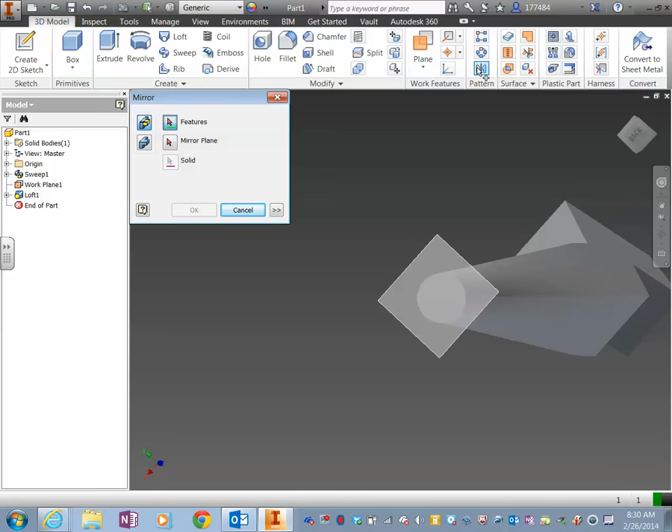So it's underneath the pattern, this little one right up here that's a mirror image of each other. The first thing you do is create your feature, and I'm going to click both of those features. Then you select the plane you want to mirror around, hit OK, and I've now mirrored around that plane. That's how you use the mirror feature.

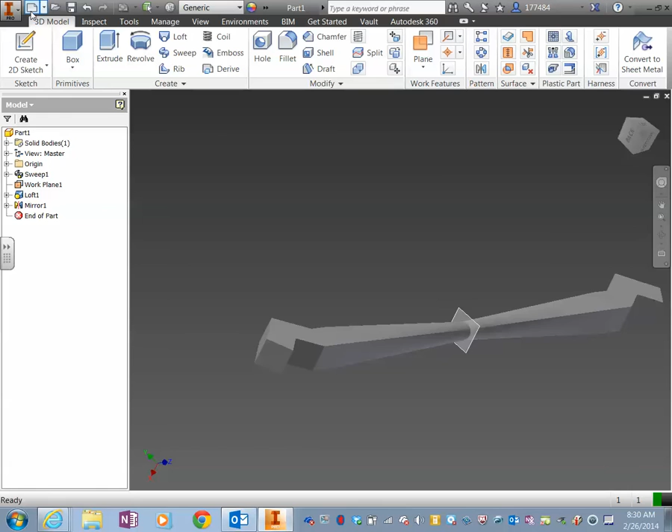Next thing we want to do is create or be able to draw on a circular surface. Unfortunately, the reality is you can't draw on a circular surface, you can only draw on flat surfaces. But sometimes we need to get to that, at least have a flat surface on the circular surface that we can draw on.

So to do that, I'm going to create a circular surface, and I'm going to do a cone, just to be a little different. Hopefully I've touched all my edges here. Nope, I haven't, so I need to make sure it's a closed shape.

Alright, so there I got a nice closed shape, and then what I'm going to do is I know that this is going to end up making a circular surface because I'm going to revolve it to make a cone. So what I'm going to do is put a point right there.

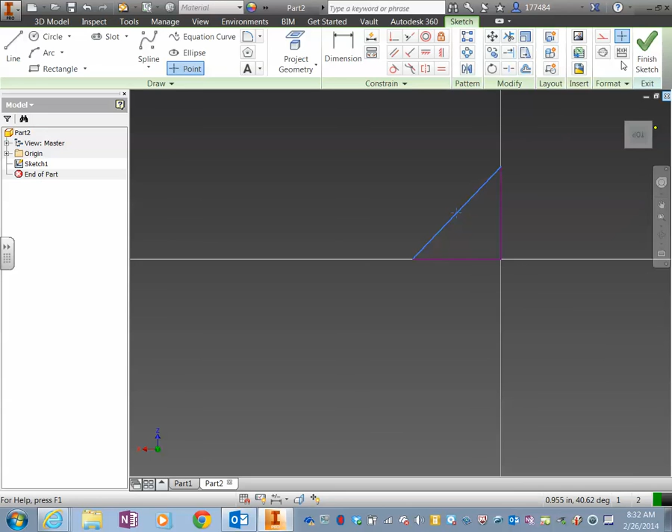You can always go back and add a point later on when you figure out that you want to draw a work plane on there. Go ahead and finish my sketch, and then I'm going to do a revolve around here and hit OK. Okay, now that's consumed.

Here's the secret: you have to make the sketches visible, because there's a point on that sketch, but I can't see it unless I make that sketch visible. And hopefully, yeah, it's right there. But I have to make that sketch visible to be able to use it. Can't emphasize that enough—when it doesn't work, chances are it's because you forgot to make the sketch visible.

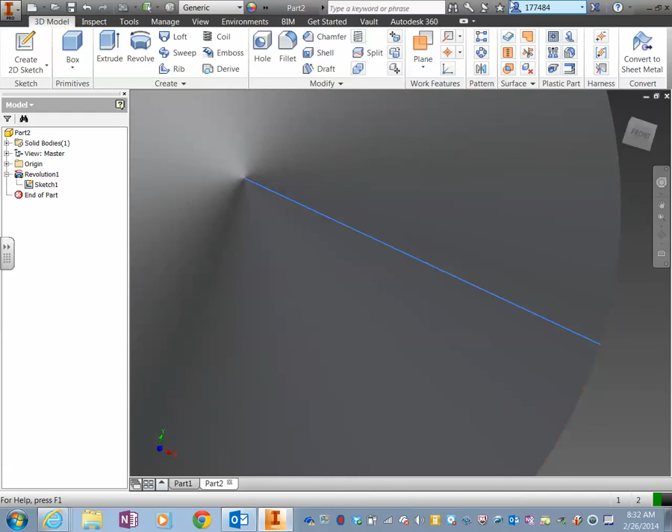Then I'm going to go over here where it says work plane, and I've got all of these different options for creating a work plane. So I can do it tangent to a surface through the edge, or tangent through a point. I actually have an edge, so I might have been able to do edge, but I'm going to go through a point.

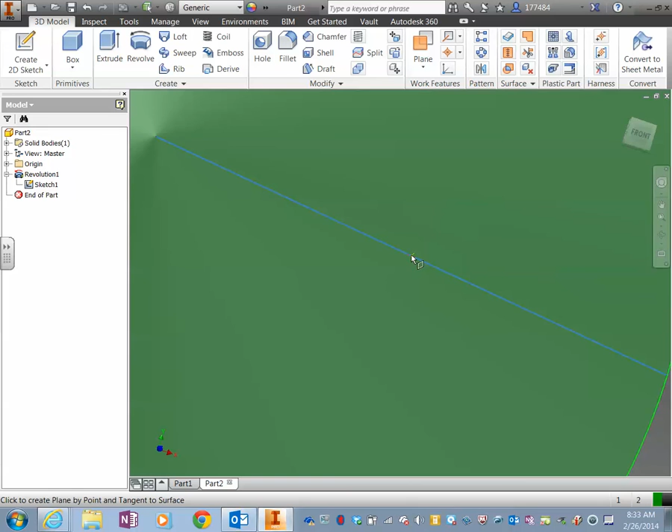So here's my surface, and somewhere in here is my point. There's my point, and there—put a work plane on my curved surface. So now I can draw on that work plane, and if you notice, it's going parallel with that slanted curve on there. But if you do a cylinder, same thing. That's what you have to do to be able to draw on a curved surface.

Any questions on that?